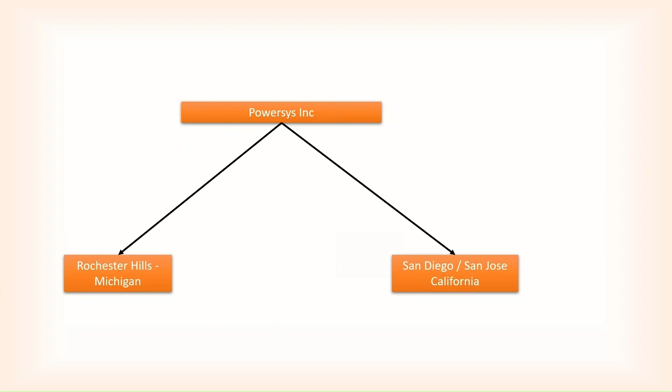Our company dates back 18 years - close to two decades of existence with over 50 employees across the globe. In terms of North America business, we operate from two regions: one in Michigan and one in California. In California we have offices in San Diego and San Jose, and in Michigan we are located close to Detroit in a city called Rochester Hills.

So coming to the topic of today, as I said, today we are going to present the simulation technology tool for electromechanical design, which is JMAG. The topic for today will be new functions and features in JMAG version 19. Beginning of this year we released the latest version, version 19, and we will be discussing some of the key features and new functionalities implemented as part of this release.

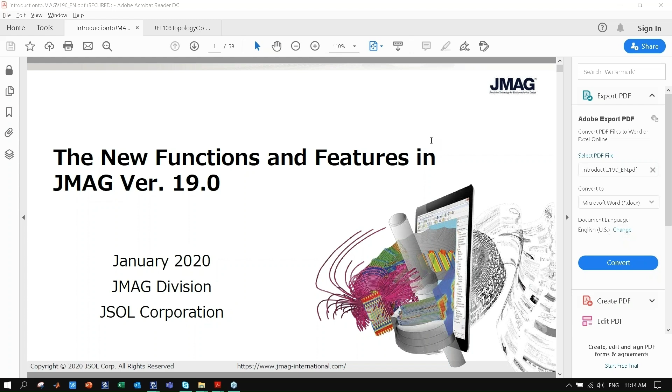In this new version, JMAG has evolved to become a tool that enables you to explore a vast design space with speed and ease. Number one, by changing your model's parameters and evaluating results in a simple two-window interface - that will be one of the demos later. Number two, JMAG introduces a rapid topology optimization algorithm - this will also be shown in the demo. Number three, JMAG is able to speed up your models, ranging from small and middle size up to large scale calculations.

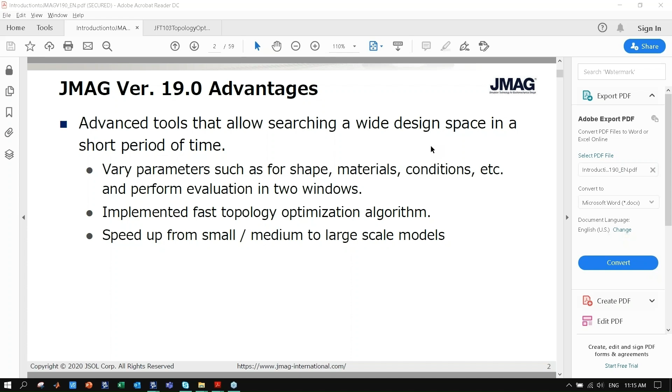And first, let's check out the solver improvement.

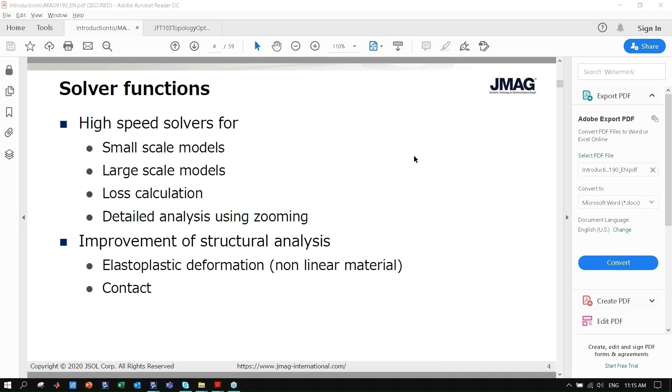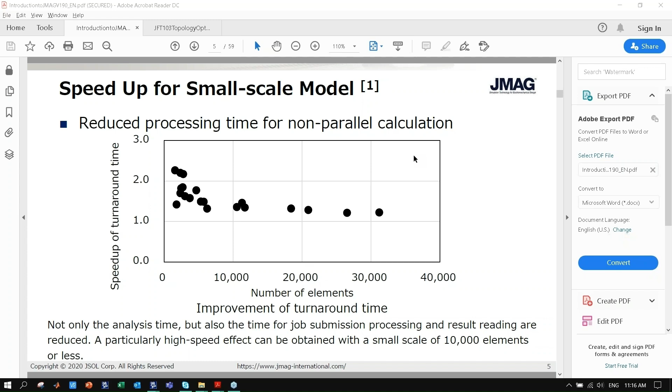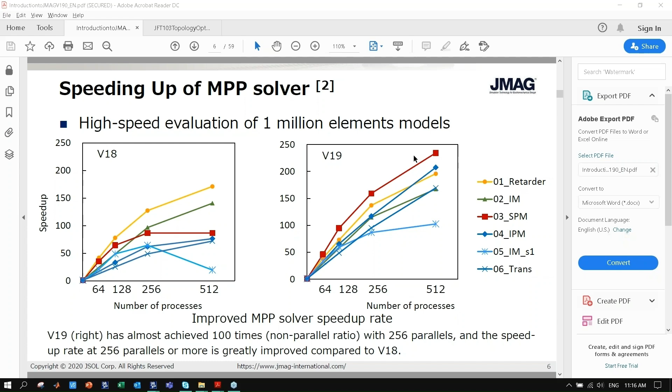The effect of this speed up is especially beneficial for large multi-case small-scale analysis using 2D models. And the speed of the highly parallel calculation solver has been improved too. This graph displays the speed up rates for several models, each having about 1 million elements. The improvement is the most significant at 256 and 512 cores. At 256 cores, the solver now achieves an average of 100 times speed up compared to a single core. Although usually 3D analysis tends to be the focus of the use of parallelization, the recent improvement will also benefit your large 2D analysis.

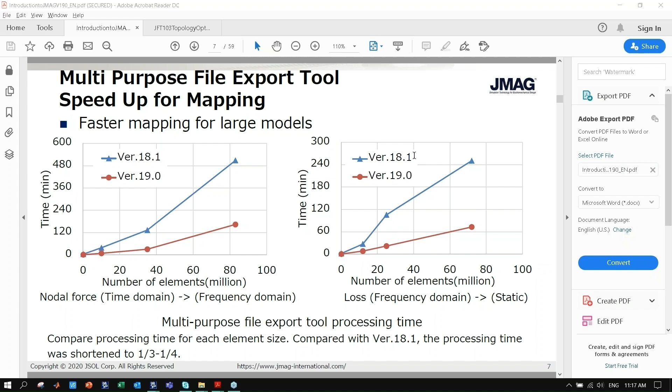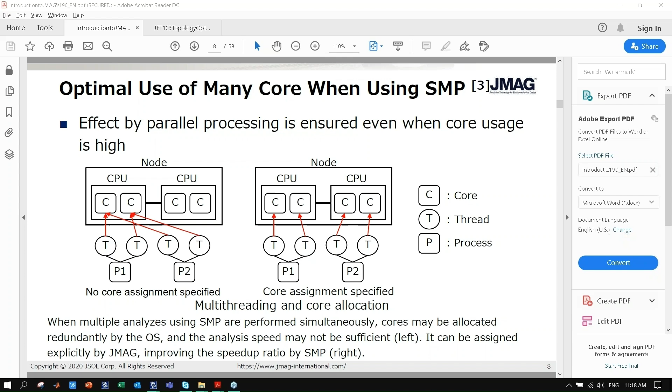The parallel solver function has been enhanced so that even when the rate of core usage is high, the effectiveness of SMP parallelization is guaranteed. When simultaneously running multiple analyses using SMP, the operating system could sometimes assign multiple tasks to one core, resulting in a degradation of the analysis speed. Now this will be avoided as JMAG has cores assigned specifically for each SMP calculation.

The loss calculation in JMAG has been improved, as the anomalous eddy current loss accuracy has been enhanced by identifying the anomalous eddy current loss coefficient for each frequency. JMAG avoids the overestimation of loss due to the use of a single coefficient. So JMAG provides a tool allowing you to set these coefficients and a script to identify them.

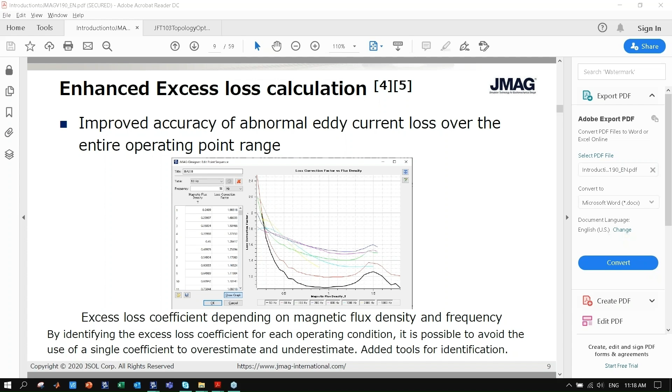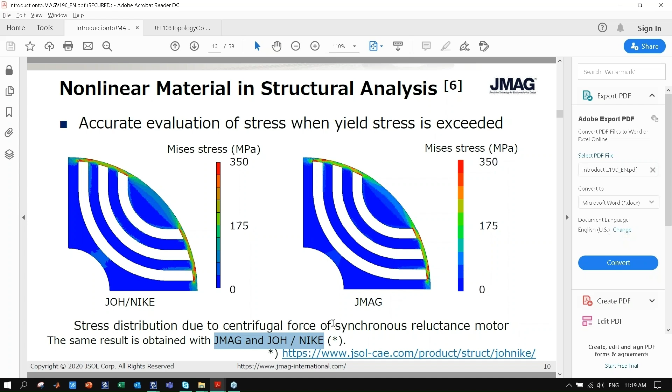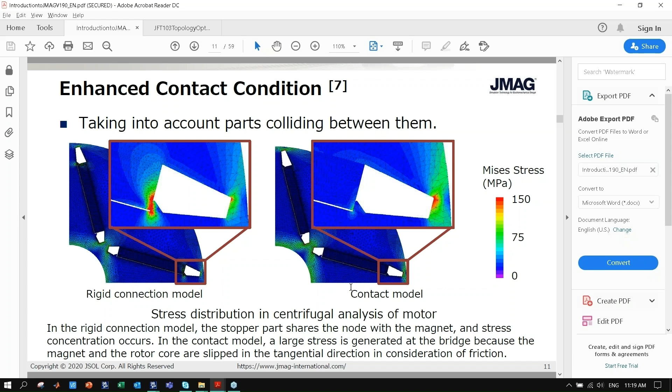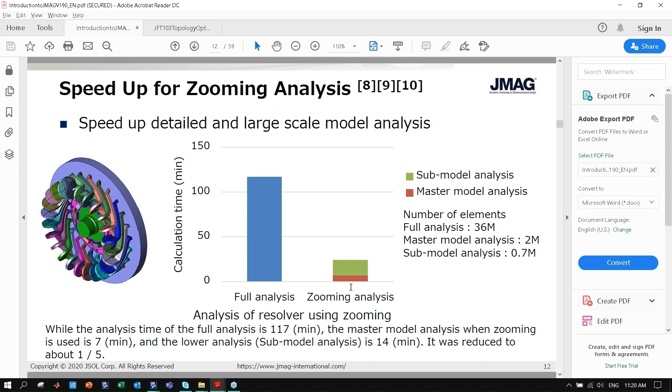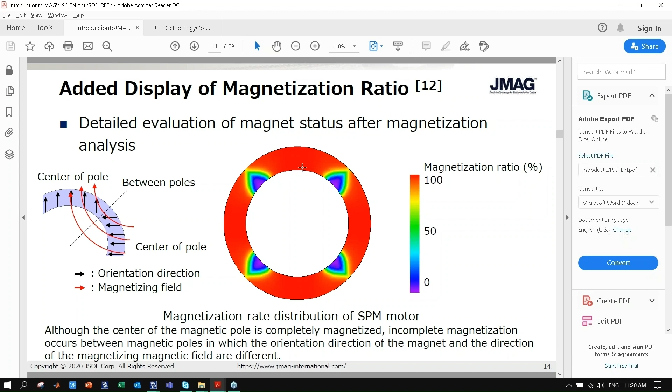Now let's check out the mesh.

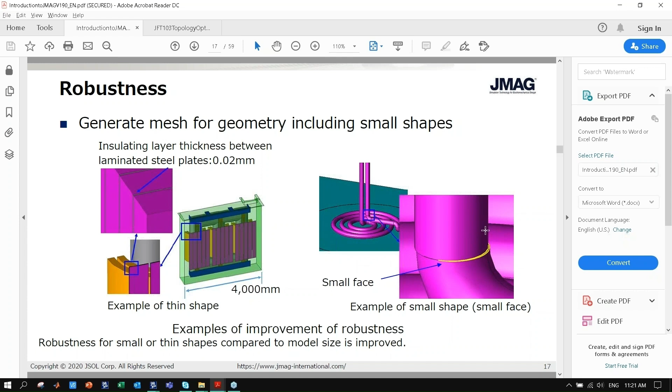The mesh is even more robust than in previous versions, especially for geometries that include misalignment or small shapes and faces compared to the size of the whole model. The mesh generation time for large and complex geometry featuring multiple curved surfaces has been reduced. By speeding up the solver along with the mesh generation, the time required for the whole analysis has been reduced.

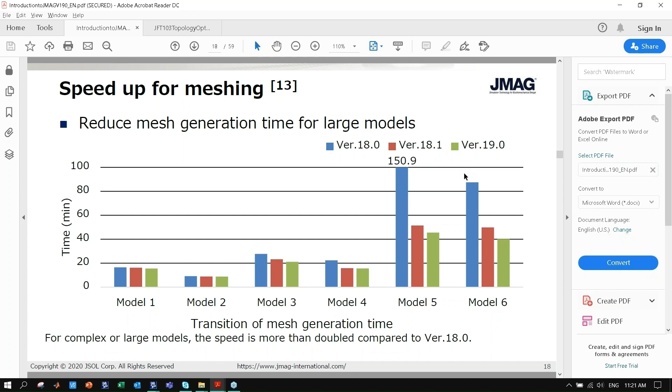And now comes the first demo.

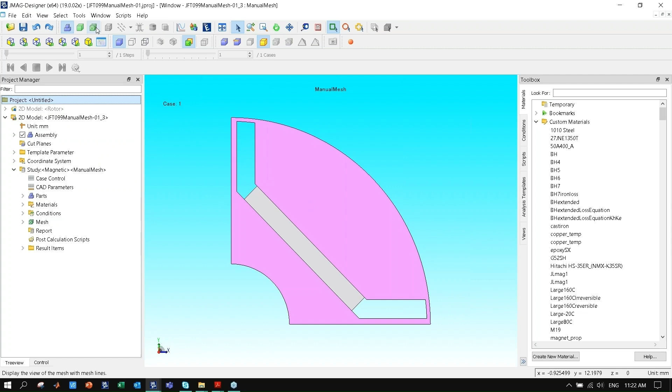JMAG allows mixed mesh. It can be well seen with this simple example. For example, if you mesh the magnet using a geometry editor and then import it into JMAG together with a rotor, this is the simplest example for the mixed mesh. Then in the mesh property, you only need to check preserve existing mesh and regenerate. Now we'll see the combined mesh.

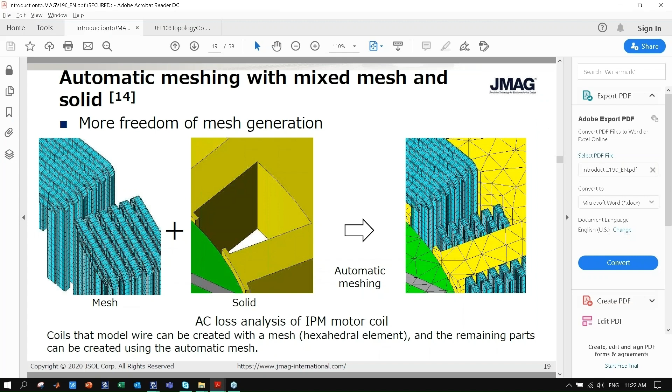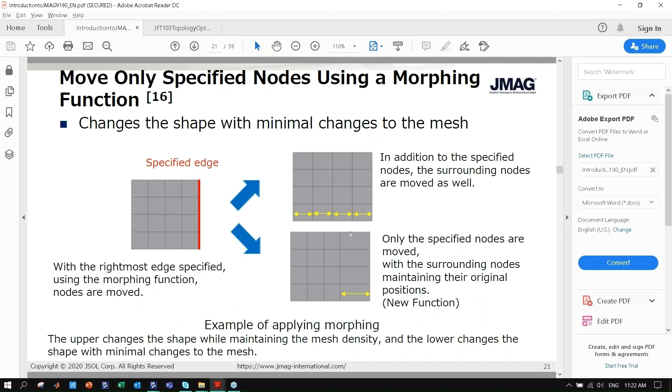You can also apply skew on meshed models and move specified nodes using the morphing function. And you can also delete the duplicate nodes, otherwise it will cause a matrix error.

Now let's check out the pre-post processing feature improvements. With the introduction of the Analysis Parameter View, also known as APV, all analysis parameters and settings are compiled in a single screen. Let me show you the second demo.

The APV is a new item in the study: right-click Study menu, Analysis Parameter View. Here, you can see everything that you used to do separately is combined in one single window, and you can uncheck items if you think that is too much for you.

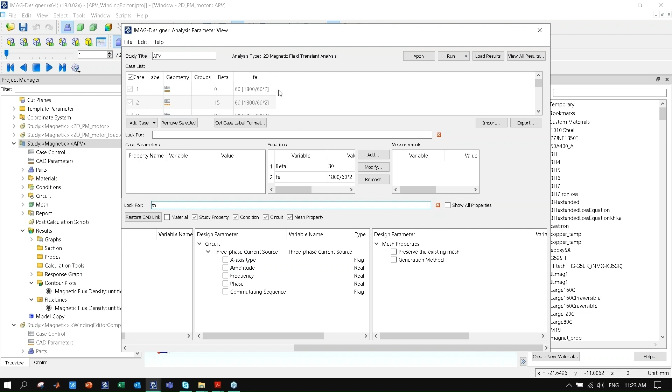For example, if you would like to change the amplitude of the current supply, you can say 3-phase, type TH, and then click this amplitude. Please note the amplitude is added in this area and this area by itself.

Since I already have the result, that's why it's gray. You don't have to go outside of this window to run, load the result, and view the result. Everything can be done in this same window.

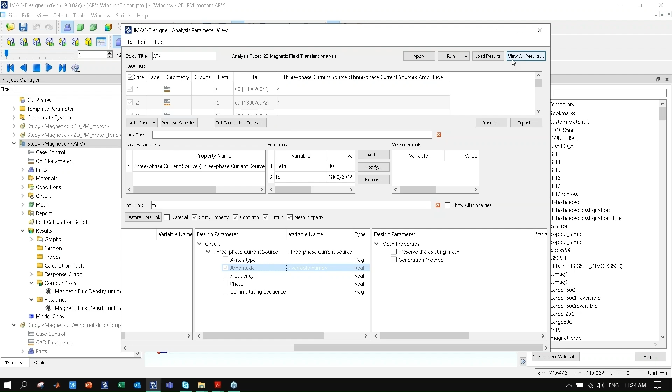Once you click run, it will run all these results, and when you load the result, it will load the result. When you say view all results, since I already changed the parameter, I said no, don't save it.

I have predefined the contour plot and flux lines, so only this will show as a result. Under the display, this is the third case, step 1.

I can change the step by moving the sidebar to see the animation, and I can also change the case. For example, I changed to case 4, step 9.

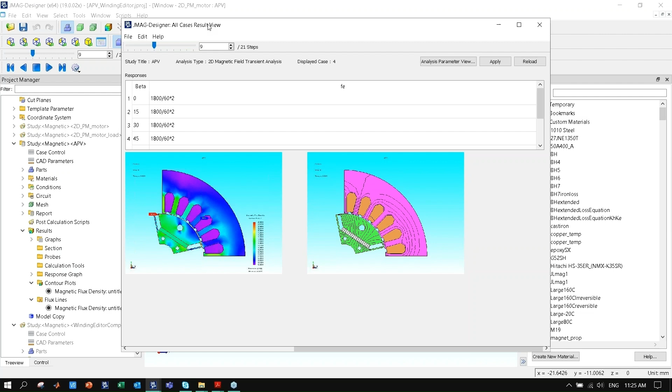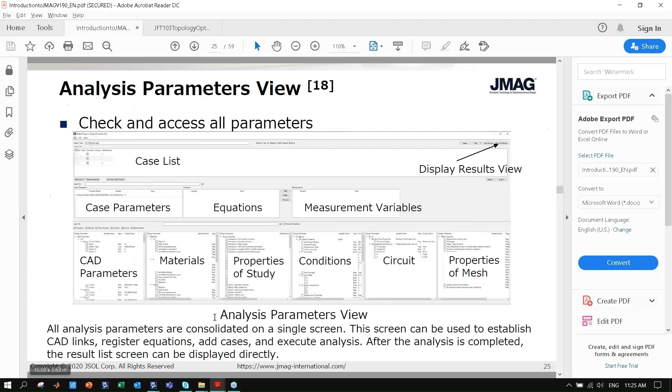So this GUI has 2 windows: one is the APV, and the other you can call ARV, to show the result. Those are the 2 new GUI windows, and that's what is shown as the dashboard in this presentation.

Models with 3D and windings can now have their winding settings configured with ease, thanks to the Winding Editor. Some of you might have used the 2D winding editor. It is especially useful and saves a lot of time if you have bar winding with many layers. So that comes the third demo.

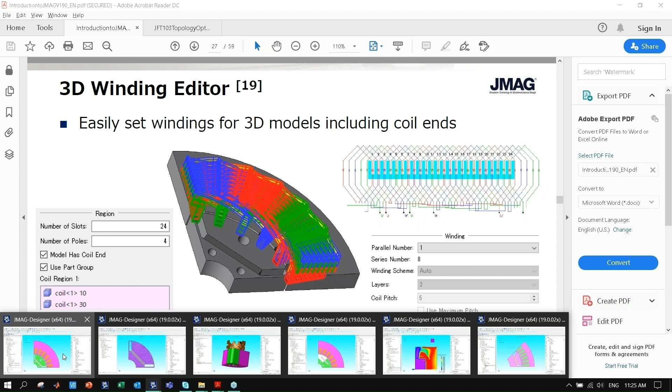We start with 2D. Basically you right-click a study and say add winding, and this winding will show up. It has 2 parts: region setting and winding setting.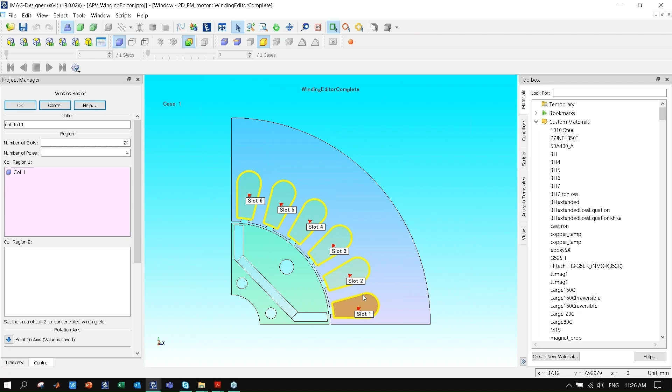With the region setting, you basically only need 3 pieces of information: number of slots, number of poles, and then select 1 coil region. Based on this information, it automatically captures all the rest of the winding regions. This is very similar to the express setup or winding setup window.

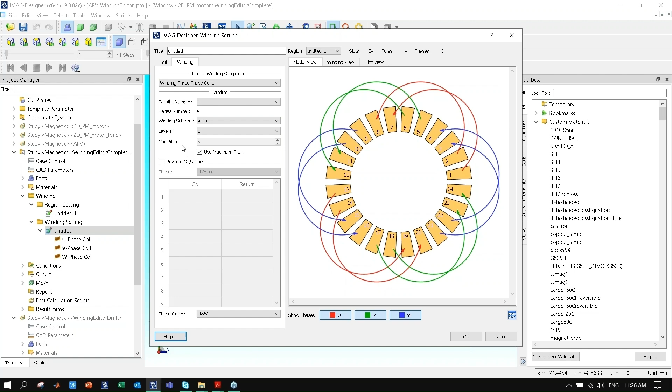You specify number of turns and resistance, and link it with this item in the circuit, then specify pitch. This time I specify 6. Then you can see it is all automatically created. So in the end, you basically only specify this first winding. That's the 2D case.

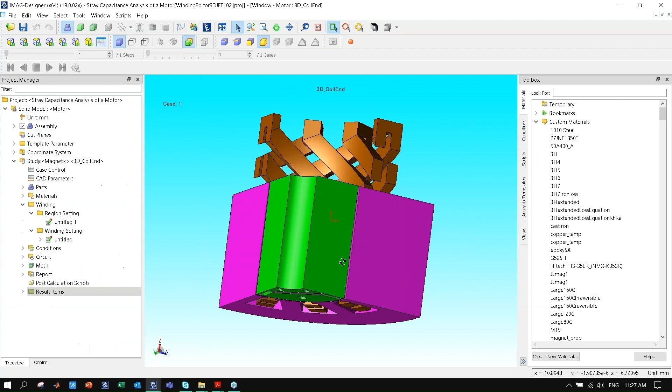I also have a 3D example I already set up. First of all, JMAG has a tool, it's a template-based tool. You can specify the parameters and JMAG will create this winding for you, called the coil template. You don't have to ask your CAD engineers to help you. It's very easy to create, and you can create much better, good looking results. It's really like a CAD file with this coil template.

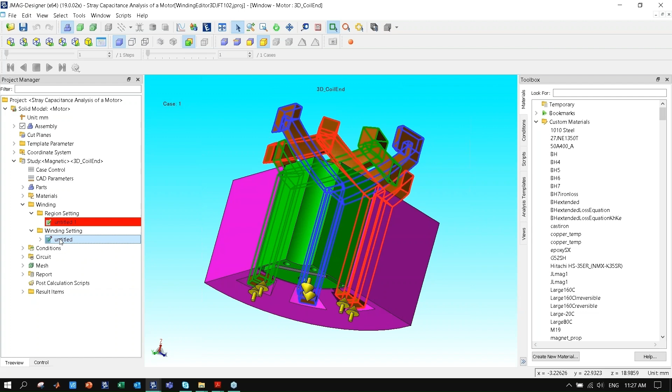Once you have that coil with end winding, you can use the same winding editor tool, which now supports 3D with end winding. Again, you have this winding diagram here, and again you only specify 1 coil. As you can imagine, if you have many layers and many slots, this will save you a lot of time.

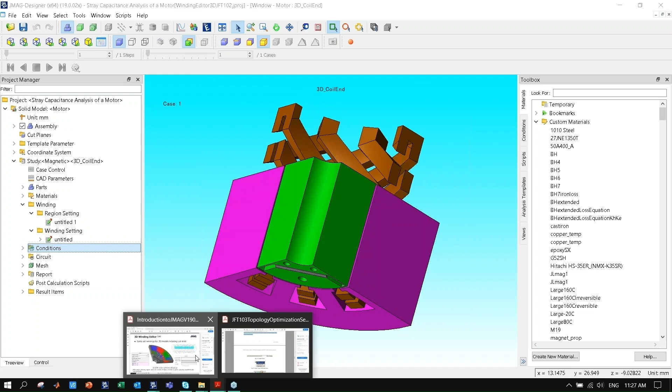And the link to NX was done via Capri, and now JMAG has its own CAD link, can also do the same thing. JMAG also allows you to get more out of the flux lines, get access to flux lines length, coordinates, physical quantities on lines and line integral.

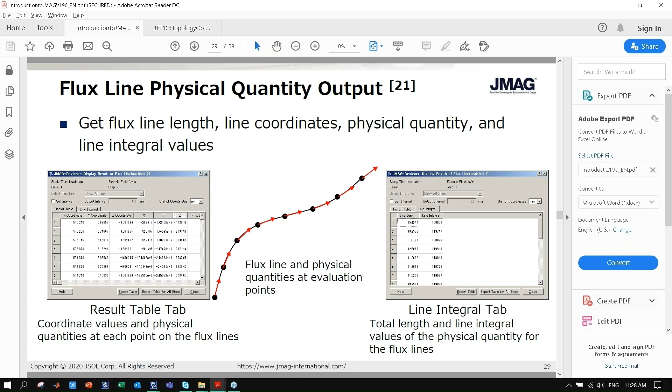Materials can now be assigned on an element-by-element basis. Sensitivity due to changes in geometry and material deterioration can now be evaluated with ease, without the need to use the geometry editor. So the operating time and complexity of the task are significantly reduced.

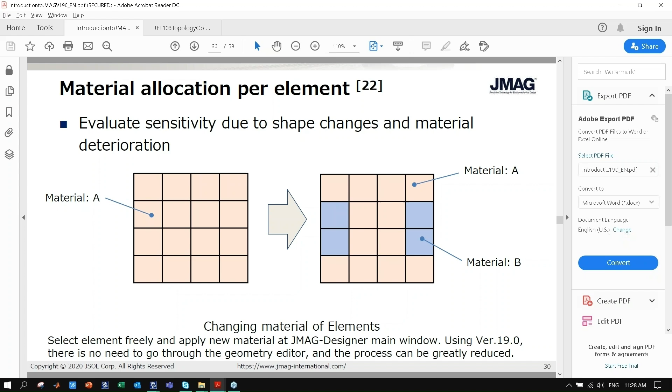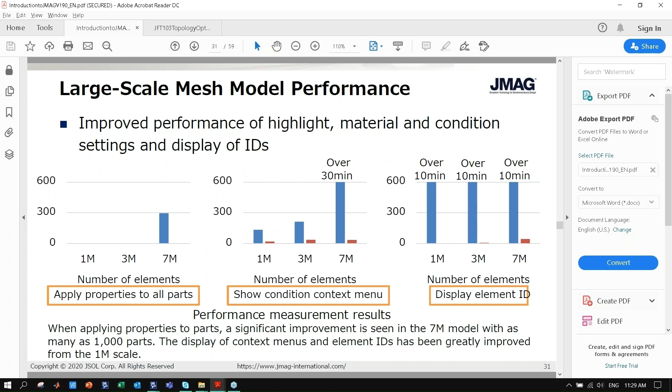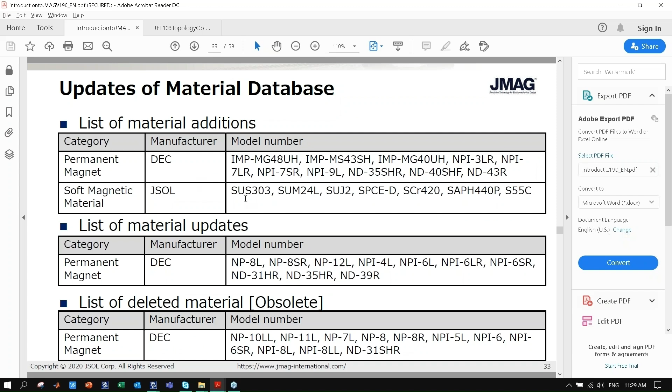And the JMAG Remote System 4.0 has been released, and the time required for calculation processing also reduced. And these are some material database changes. I won't cover these in detail. If you're interested, you can check on these improvements.

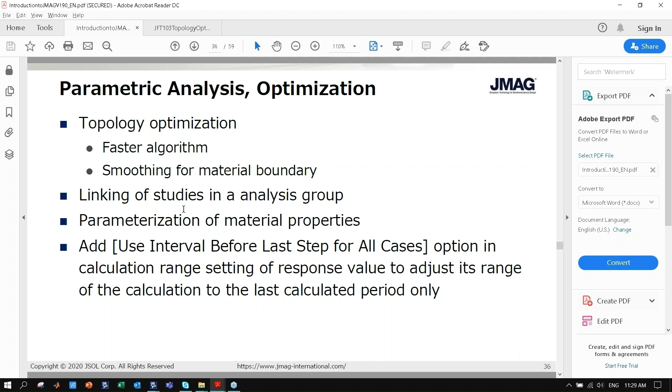Many of you are using the parametric analysis optimization feature on a daily basis, and I will introduce the key improvement for this. The topology optimization is a very inspiring feature that gave you new ideas and innovation ideas for motor design. JMAG already has NGNet-based topology optimization, and now it adds a density method.

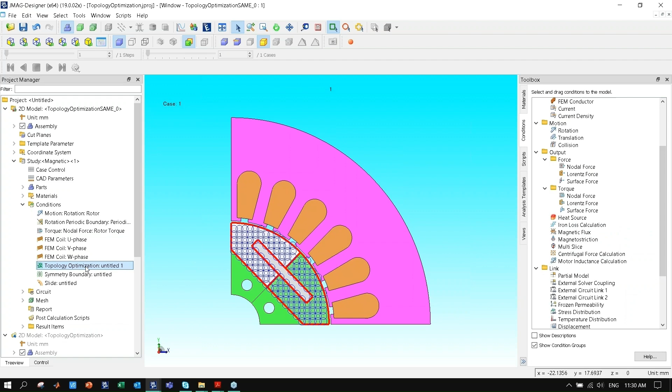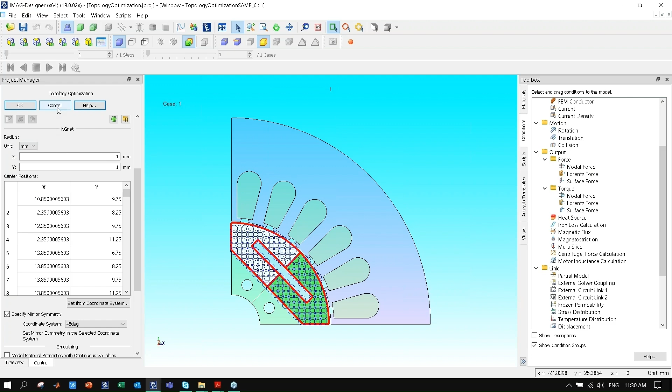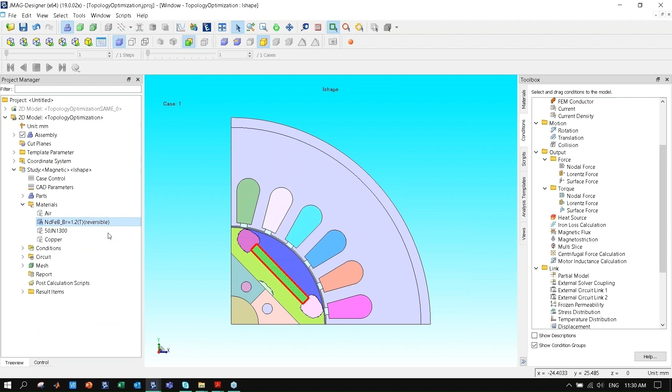And now comes the fourth demo. I will show you... Okay, I need two flux barriers for both ends of the magnets.

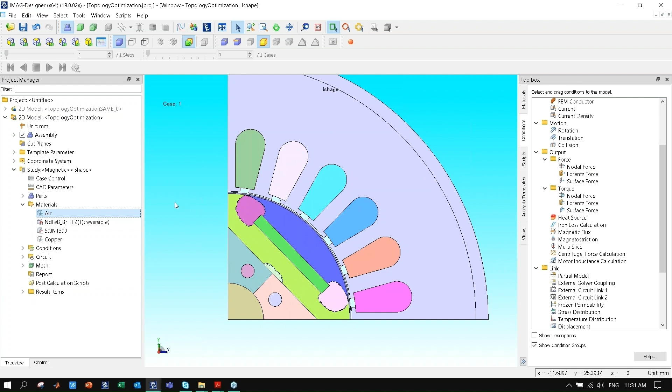This shows the topology optimization works. And of course, this one is... oh, sorry.

This optimization is a multi-objective GA-based topology optimization. And see the number of generations I use, and population size, number of children. As you can imagine, this takes a lot of time.

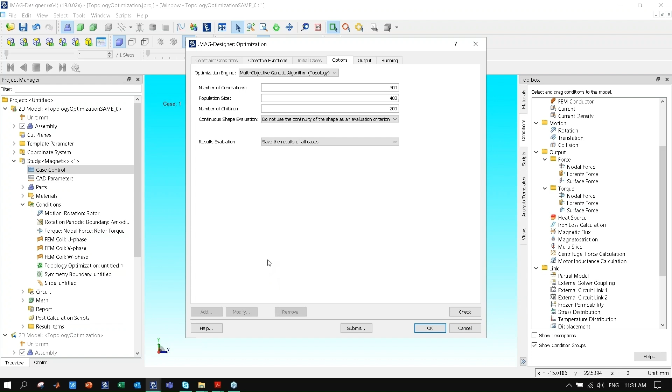We do have a server, like an HPC, and it takes about a little less than a day to run this optimization. However, not everybody has that. So JMAG has a new method called the density method. So with that...

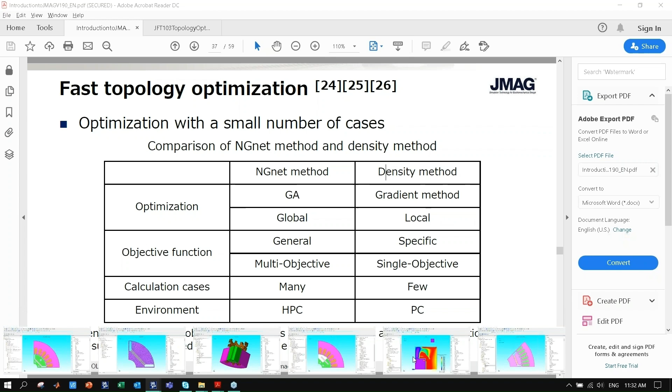This is an example of the topology for the density method. So this one, see, I only have 11 cases. It runs very fast. You can run it on your local machine. And that topology optimization is this other type, and you can set this.

So the problem is you have a coil, there is some current flowing through, so it generates a magnetic field around it. And this is the shield. This has no material, it's just made of air. So we are going to evaluate the effectiveness of the shield.

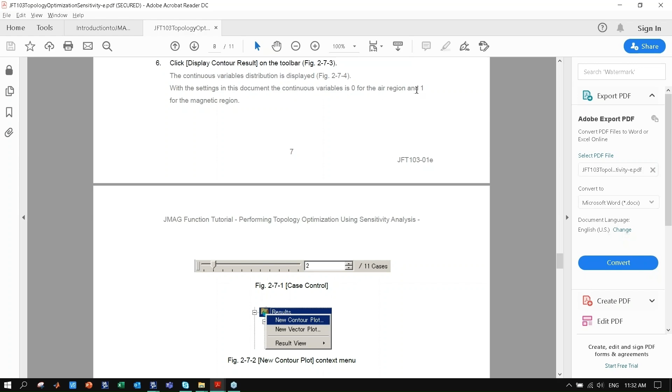So what this shows is a continuous variable. What it means is the continuous variable distribution is showing the continuous variable. If it is 0, it means it's an air region. If it is 1, it is the magnetic region.

So it shows, okay, 1 means you need this part, you need that to be the shield material. The blue one or purple one, this one is not really needed at the shield. So you know, that's the distribution of material. Of course, in reality, you cannot make such a shield, but it gave you an idea of where you wanted to put your material.

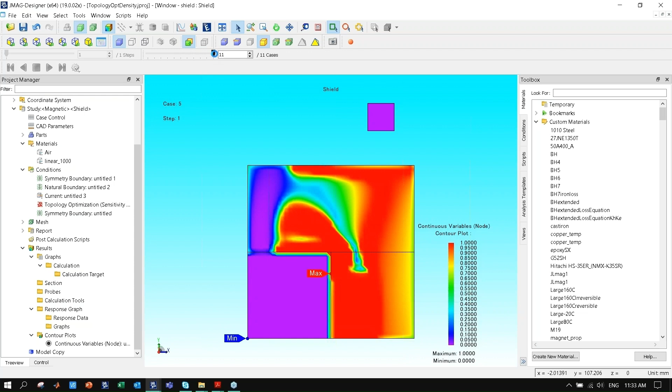And that's the last case. So that's the demo of topology optimization.

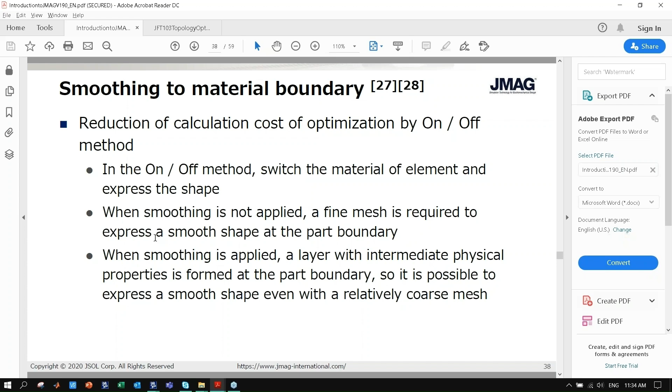And of course, when using the on-off topology optimization method like the NGnet, we can now use a physical boundary smoothing function that has been introduced, so the boundary is not completely on and off. This helps the geometry look smoother.

And in some cases, when you have two or more studies, it's not necessarily both or more are EM analysis. It can be multiphysics, can be one EM, one structural analysis. And then sometimes you need to pass the result from one study to another study. Now you can do that in this new version.

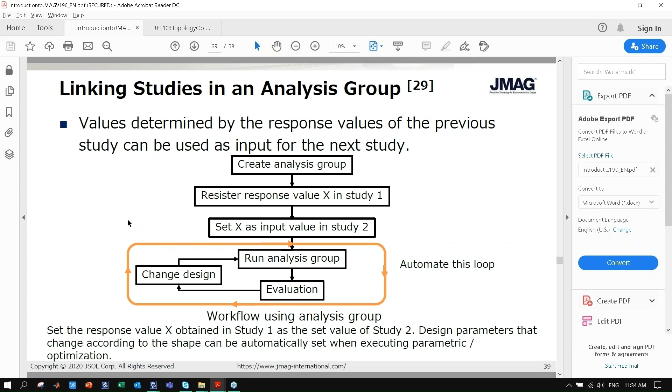And then also for parametric analysis and optimization, you're not only limited to magnetic properties. You can use electric, mechanical, thermal, and iron loss. All these parameters can all be used for your optimization or parametric analysis.

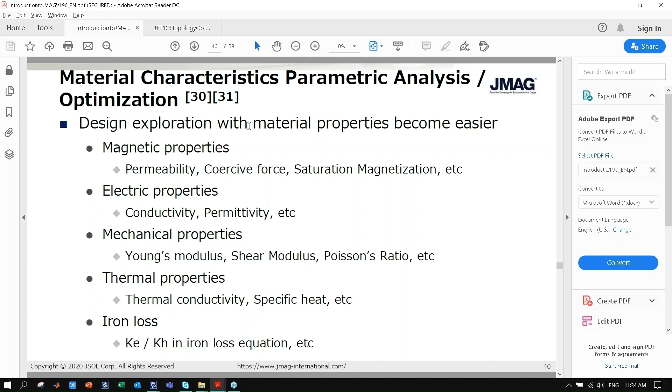And now we're moving to efficiency map. I believe this is a very interesting topic because even if you have your own code, you can still have this as a second opinion to compare to your own result. And also, it is very impressive how fast JMAG's efficiency map runs.

So you may even consider including this in your parametric analysis. It's very helpful to know whether your design is good or not.

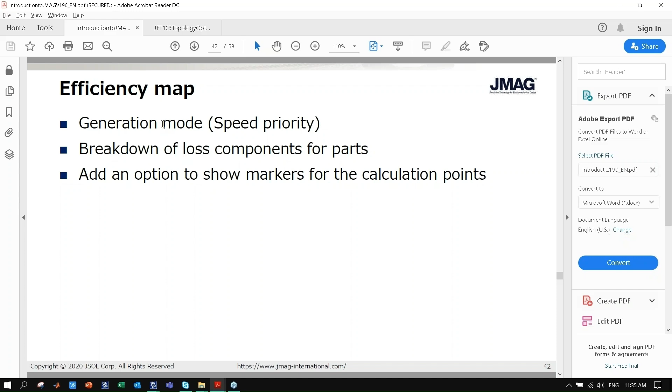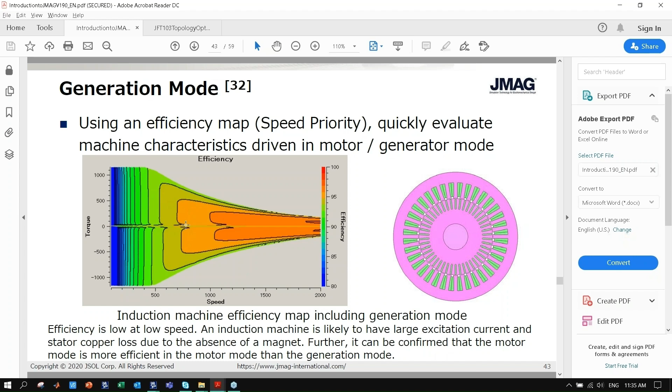So JMAG has this feature in the last version already, but this version we added a generation mode. As you can see, this is for an induction motor. And we also allowed the loss breakdown for rotor and stator.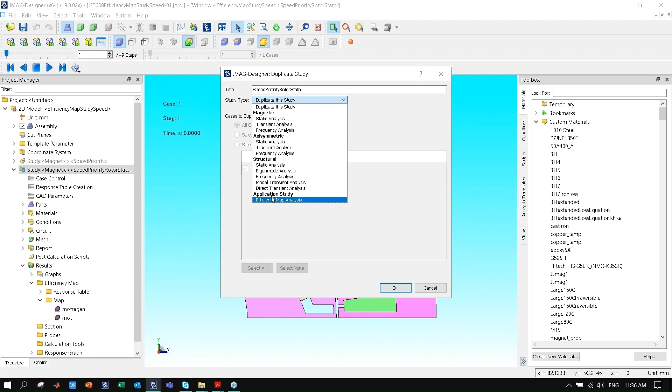Basically, you duplicate your study and select the last one, efficiency map analysis. Then the efficiency map analysis is created. What you need to do is populate the current, phase, and speed you would like to sweep, and change the number of poles. This currently supports PMSM and induction motor.

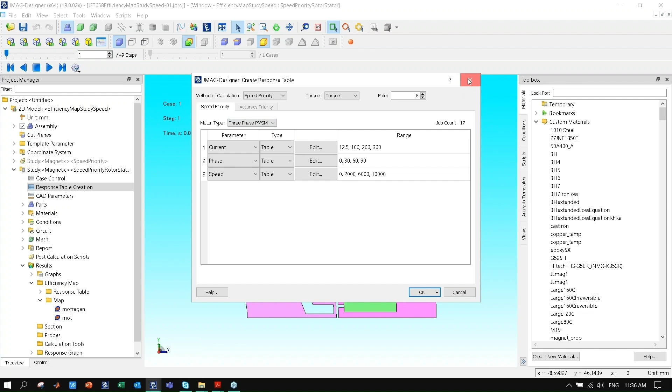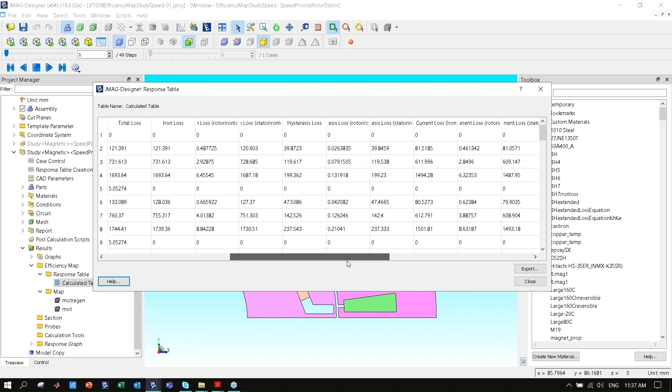Once all these cases are run, you can create a map based on the response table you get from that sweeping. Basically, you sweep these three parameters, then you get the average value for loss, for flux, for inductance. The efficiency map is calculated based on those results.

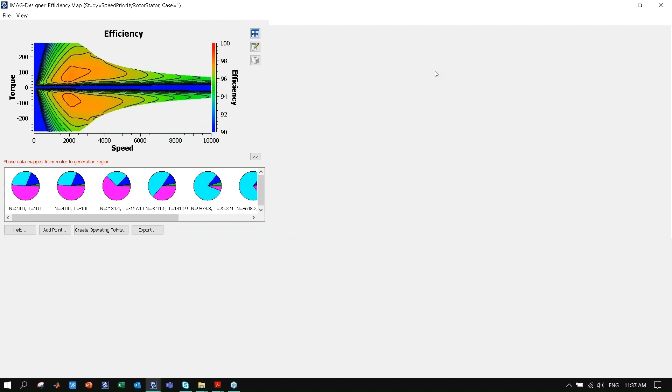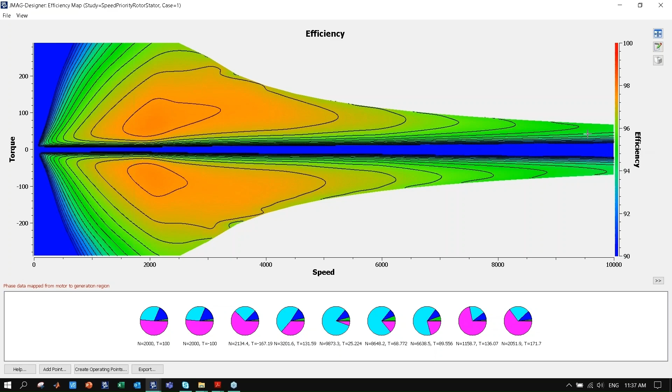You can export the result, and when you look at this point, for example, you can right-click and add point—this point is added. It confirms that at low speed, copper loss dominates, and at high speed, iron loss dominates.

For accuracy priority, you have these points to simulate more accurately. You can add PWM effect control circuit, but sometimes it looks unconvergent or inconsistent compared to other points. You can right-click, go to case, and check more in detail.

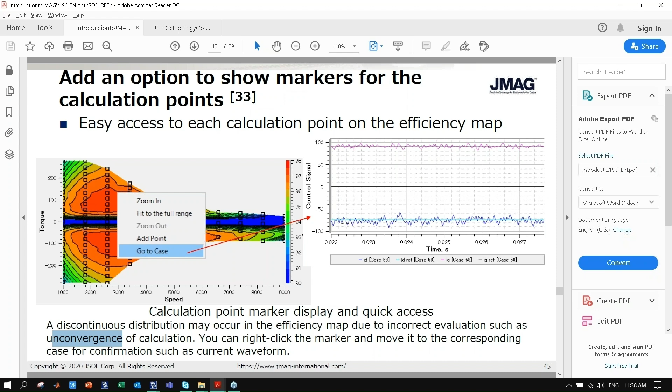Now let's check JMAG-RT. There is a new PMSM model in JMAG-RT called the flux integration method model. This method uses flux instead of inductance and flux like in the past. So as you can imagine, the number of matrices is reduced, though the size increased a little bit. In the end, you still get a 50% reduction in simulation time.

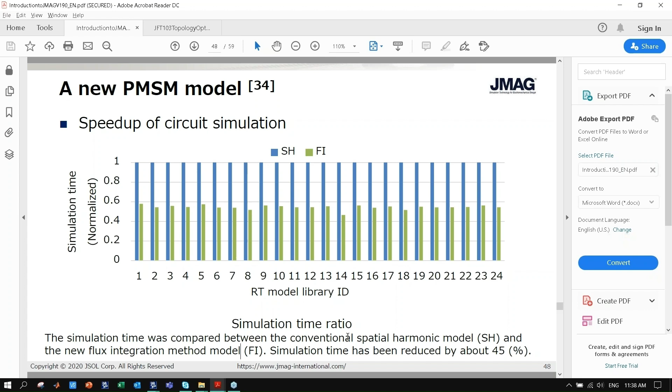And Express has big changes this year. Two things are added: one is efficiency map, one is thermal analysis. Efficiency map is always helpful, whether in JMAG-Designer or Express. It can help you, from an early stage, predict the machine efficiency and see if it's too far from what you expect or not.

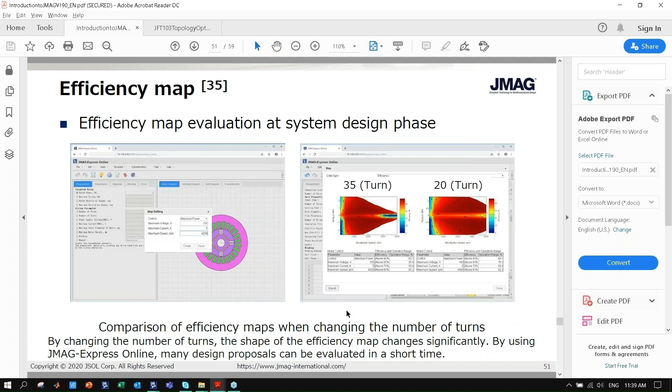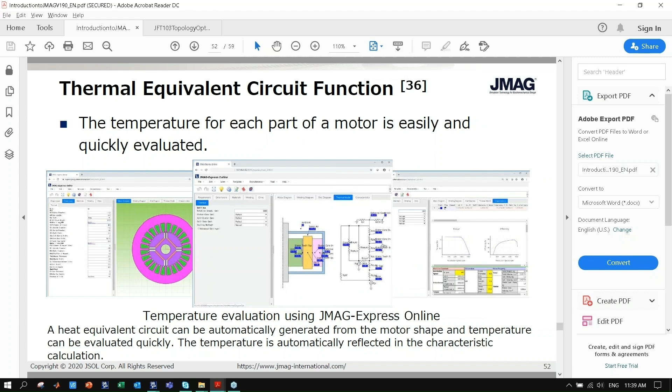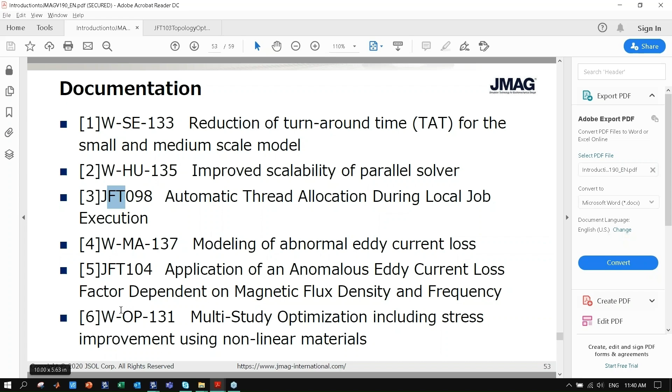This is the list of documentation. On almost each page there is a reference like a thesis, so you can refer to these. W means white paper, showing the theory, and FT is function tutorial, focusing more on a specific function. AC is application catalog, showing examples, and there's also an application note showing how the model is configured, what conditions and materials are used, a review of results, and a quick analysis.

Thank you so much for your attention.